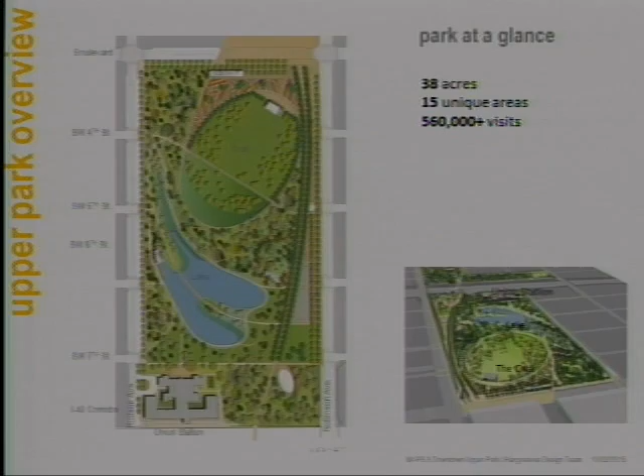One of the issues we've been working on is with the preferred operator of the park, Myriad Botanic Gardens. One of their desires was to add more program spaces into the park to create more of a destination and more income-generating sources to offset operation and maintenance costs. One facility we've been looking at is a new park pavilion on Robinson, on the southern end of the park. Here is Robinson on the right and I-40 at the bottom, next to Union Station, an elevated area.

So we've been looking at creating a big shade pavilion that is multifunctional, creating shade and the space underneath. You would have power and utilities to run several different operational things underneath depending on the season. It could be a skating rink sometimes for roller skating, other times a market, other times demonstration sports. So it's a multi-purpose space that would work both day and night.

The architects, Butzer Urban Architecture, have just started to look at this, and they're trying to develop an architectural style based on the other buildings we already have in the park, and also relating to the Skydance Bridge you can see in the background. So we're continuing to refine it based on the feedback we got yesterday as we move forward.

And so I'll now bring you up to date on the lower park, which is proceeding through schematic design. Last time we came here for the subcommittee, we had three different alternates, and we've narrowed that down to one single alternate and are seeking feedback as we move forward.

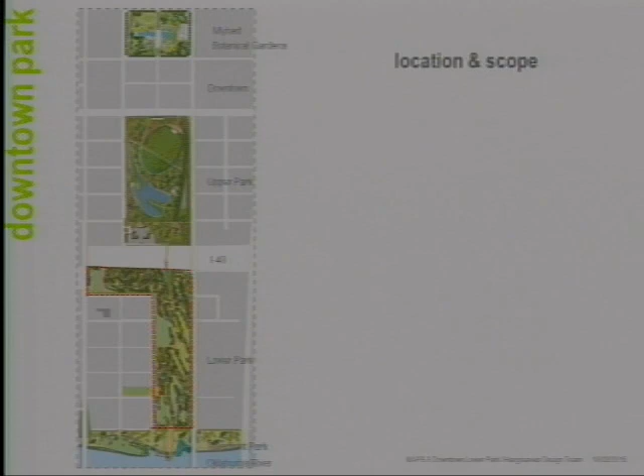Briefly, to remind you all, the lower park is the southern end of the Core to Shore idea. We have Myriad Botanic Gardens at the top, the upper park and the lower park, and then what we all hope in the future would be a new riverfront park that isn't part of the lower park or the MAPS project, but something we encourage thinking about into the future. The lower park is about 34 acres, four acres less than the upper park. It has some unique areas we want to play up on, and its targeted budget is $20.5 million.

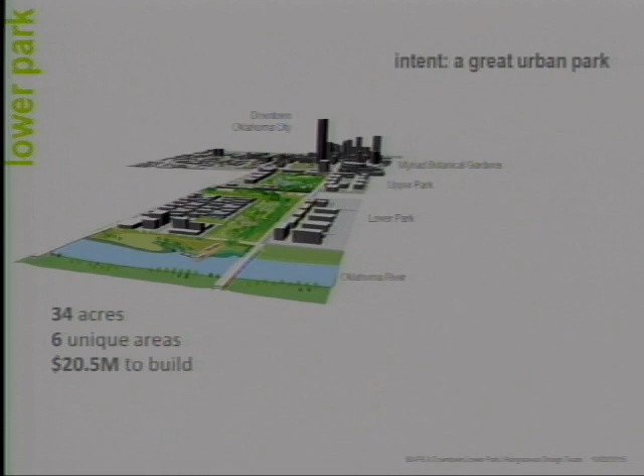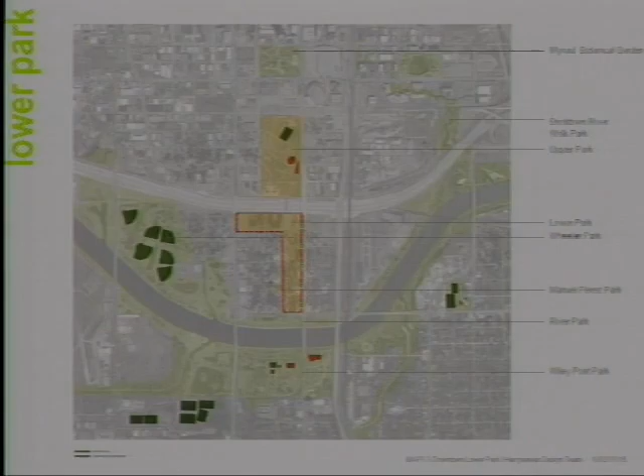We looked at the recreational facilities provided around the lower park within about a mile distance. It's well catered for in terms of ballparks, playgrounds, and other recreational facilities. In the original master plan, you may remember we had the suggestion of a multi-purpose field for athletics, and we're thinking about that as we move forward.

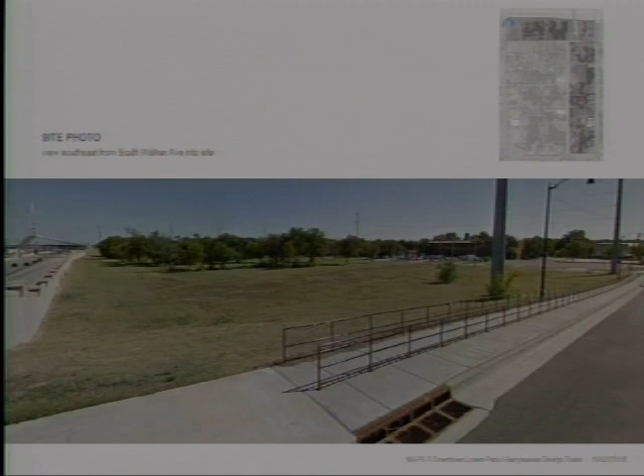The site itself is quite interesting. We're on 15th Street looking south, and you can glimpse the river, which is ideal. Turning around and looking back up Robinson to downtown, fantastic views back to downtown. But as we stand on Harvey Street, that's actually the low point of the site, so you can't see the river from there. 15th acts as a levee. As we stand on the edge of the site, you can see the Latino Community Development Agency in the background.

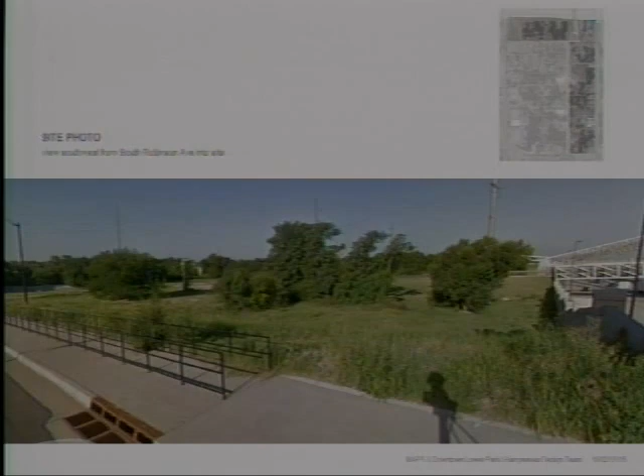And the area that was created as excess land after ODOT had finished with the interstate. Then on Robinson, looking at the area as Skydance lands down, you notice the site is quite well treed, which is very different from the upper park, and it's something we want to build upon. Here is looking at the topography.

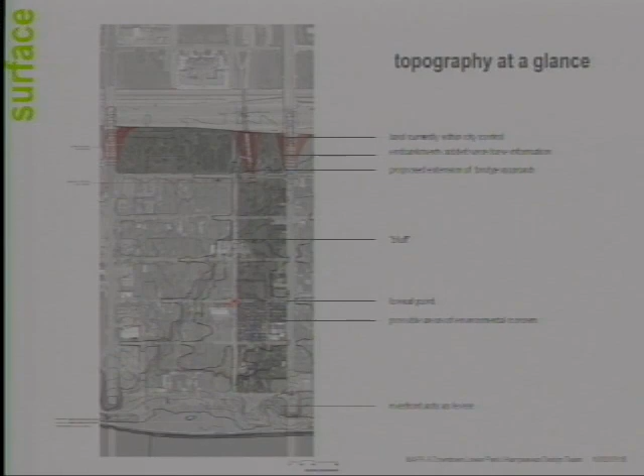There are 3 ramps: the 2 approaches of the roads that go up over the interstate, and the ramp up to the Skydance Bridge. You can see there the low point in Harvey and 13th Street. Actually, towards the river is not the low point, it's actually the middle of the park. And you can see the current land uses, former car yards, many car yards, and light industrial uses as well.

In terms of water, 2/3 of the park is in the 1:500 floodplain, but it is protected from the river, 100-year flooding from the river.

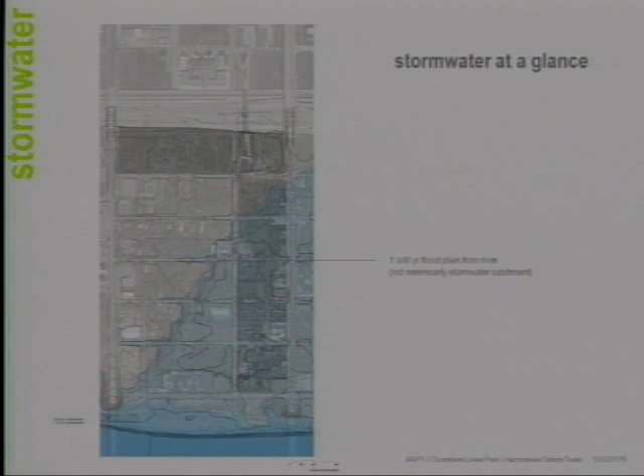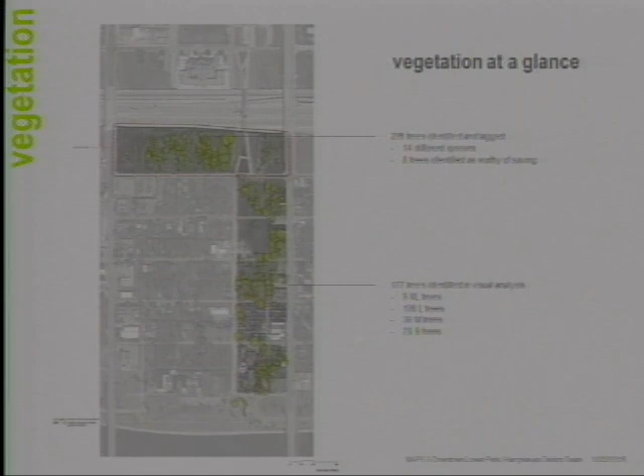The trees - we were able to do a tree survey in the northern part of the park. Confirmed about almost 300 trees up there, and from aerial photography about 117 trees. So even though the trees aren't that special, they are special in terms of providing shade and impact, and quite a different feel than the upper park.

We've looked at the road system around there. On Robinson, we want to continue through the same profile as what we're doing in the upper park, so keeping 2 lanes each way, adding bike lanes on either side, and parallel parking on the park side. On Harvey, we want to keep 2 lanes and add parallel parking on that as well.

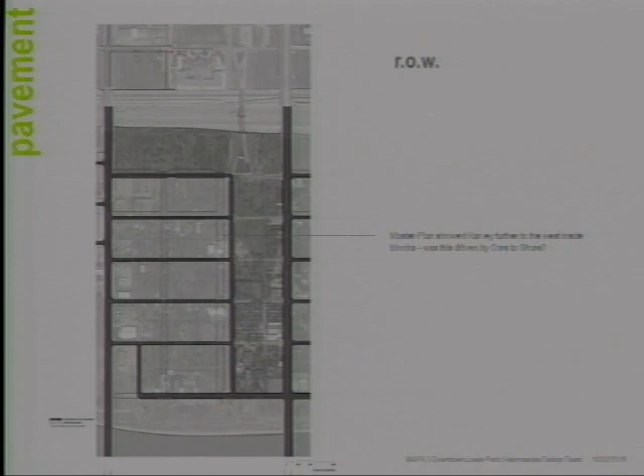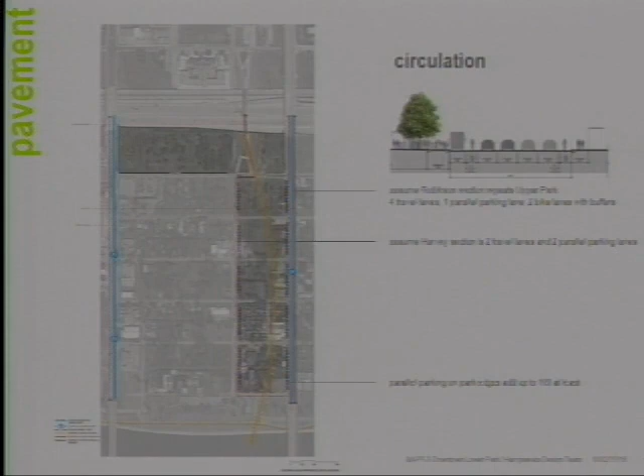In terms of pedestrian circulation, we want to continue the promenade through. That's the main pedestrian and bike, recreational bike connection from north to south. So we would come off Skydance Bridge, proceed through the entire park length, cross 15th at a mid-block crossing, and connect up to the trail system that exists on the riverfront now.

The site also has several existing buildings that we're just starting to look at in terms of the value and potential of those buildings. They are in not great shape, but we're seeing if some of them have some potential to be repurposed. You can see here some of the larger ones are in conflict with the pedestrian and bike circulation in the promenade here.

And we're looking at how the buildings could function both ways. All these buildings were built to face Robinson. In the future, they would have a dual use, facing the promenade and the park as well. So we're just starting to look at that.

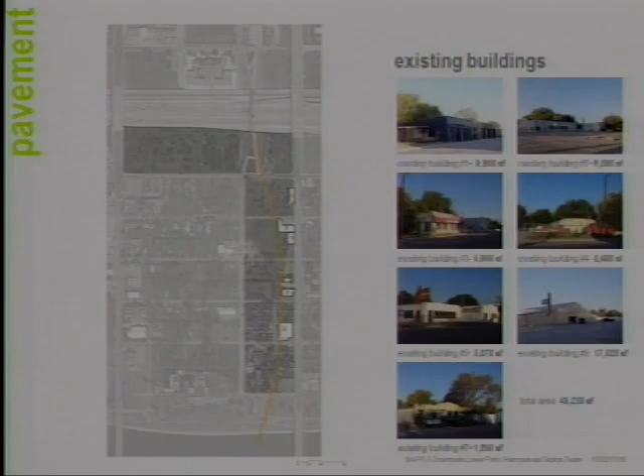As we said, we had 3 options, and we've kind of crystallized those into the thinking of a preferred layout. In the upper part of the park, above the Latino Community Development Agency, we see this still as a sports theme, although we do not want to make it like a sports complex.

That's a much bigger thing that would not actually fit on this site, but we do want to build off the idea of having at least one junior-sized soccer field, with advice from the Parks Department that the soccer field would be so heavily used that it would have to be synthetic rather than natural turf. So we're thinking of it as a synthetic field. It would be also lit for night use. It would have a pavilion associated with it for restrooms and change rooms and for shade.

Amongst the trees, we would have multi-purpose ball courts that could be striped for different uses. Also, as we move south, we're looking at, in the treed area there, a woodland lawn that could be converted into a dog run or a dog park in the future as more dog users come online around the area.

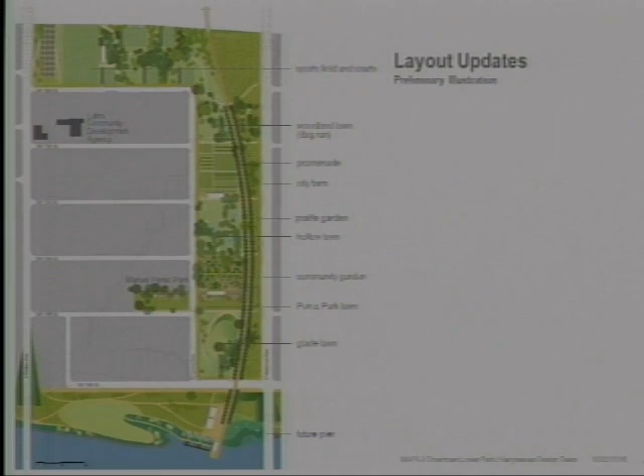As we move further down, it was quite interesting. We met with the Latino Community Development Agency yesterday and the YMCA, and an idea that Myriad Botanical Gardens came up with was, for this end of the park, to have more community involvement in gardening and also in urban agriculture. What's going on there?

Within the park, we have a city farm that would be based on urban agriculture, that would have an educational program associated with it, and a nutrition and health program, which ties in nicely with the programs that the Latino Community Development Agency has at the moment, and what the YMCA is actually interested in moving into as well.

A complement to that would also be a community garden area where membership could actually use a plot, buy or rent a plot for 10 by 20 square feet, and use that as a community garden area.

Between these two areas is what we're calling the hollow lawn. That's the lowest part of the site. Again, this is another interesting picnic area that would have rain gardens associated with it for cleaning the stormwater.

As we move further down there, you can see Manuel Perez Park, an existing city park that sits on the corner of 14th and Harvey Street.

We want to integrate that into the lower park as well. So we're moving a band of that sort of programming across and into the park that would be more cultural uses in terms of music programs, dancing programs, and kids play. That would extend into the park and link up with the city park as well.

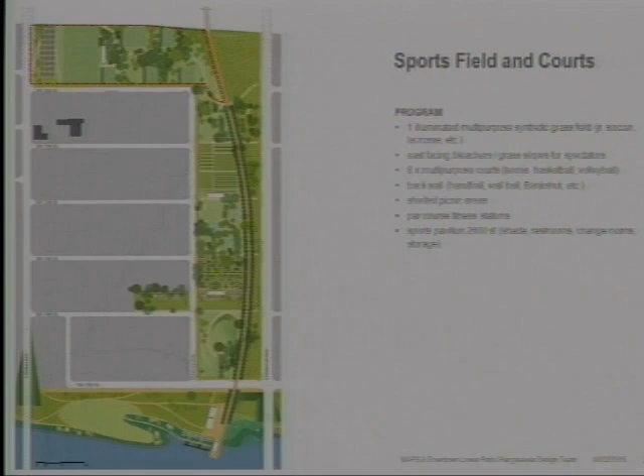We can have a par course and fitness stations throughout the treed area, so there's a trail that you can have exercise routes along, shaded picnic areas, and also a sports pavilion.

So we don't want to make it look like a typical sports complex, so there's several things we can do to make sure it's a multi-use facility that can be run in several different ways. Here's some examples of the different striping you can do, the bleachers and the shade, and the ball courts that could happen there.

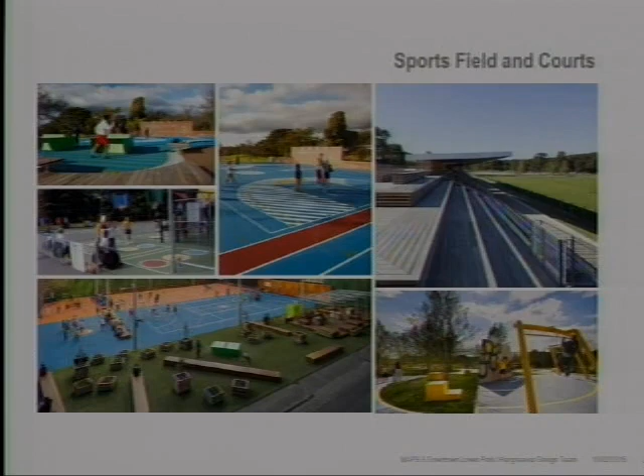The wooden lawn, we think of this as a lawn first that could be used for multi-purpose throwing around a frisbee. When there is more of a demand for walking dogs, it could be converted into a dog run and have a concealed fence around it.

The city farm, about 2 acres, so it would concentrate on fruit and nuts. It would actually be grown by the operator, so this is not a community involvement thing, although it can be used for youth training and programming as well.

Another interesting aspect of this is it can also grow the food for the park cafe and restaurant in the upper park, so it has a farm-to-table connection within the park. And again, youth programming and training.

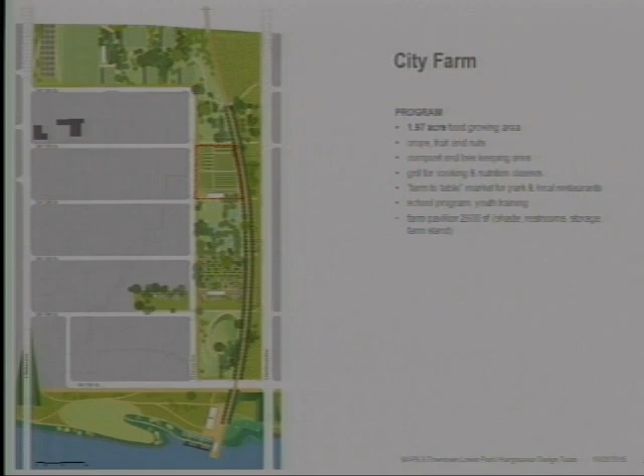The farm pavilion can also double as a farm stand to sell any excess produce for people walking through the park. So again, involving the youth into the picture is important. We're not going to go to the full livestock potential of this, but beekeeping could actually be added as part of the programming as well.

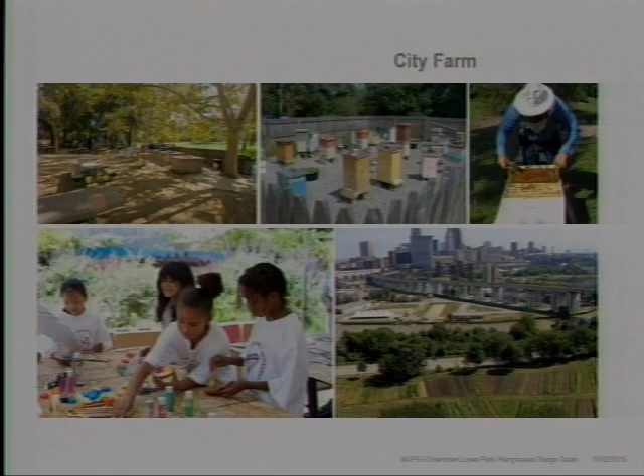The Hollow Lawn, the low park area here, a great idea for big family picnics and hammocks between the trees. There's fantastic trees there. You can sling up some hammocks to make it an interesting area to visit as well.

The community garden is about space for about 170 quite generous sized plots. This could have a seniors program as well, but also a program for young people. And it can also have a kitchen for cooking classes in the pavilion next to it.

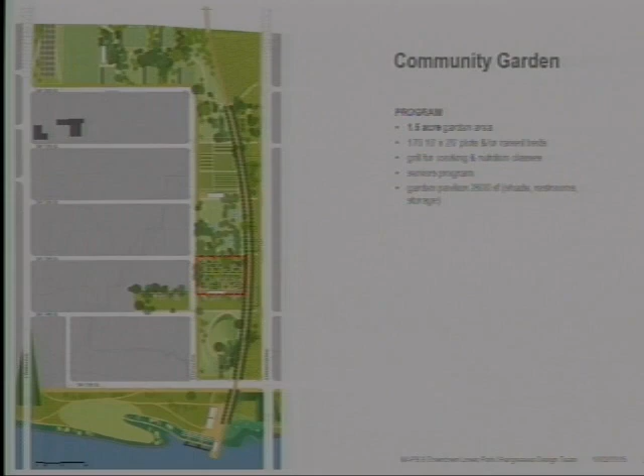So again, it would have raised beds, so it wouldn't be growing in the natural soil that is there. And Perez Park, so that's complementing the park on the city park on the west side and bringing that feel into the lower park.

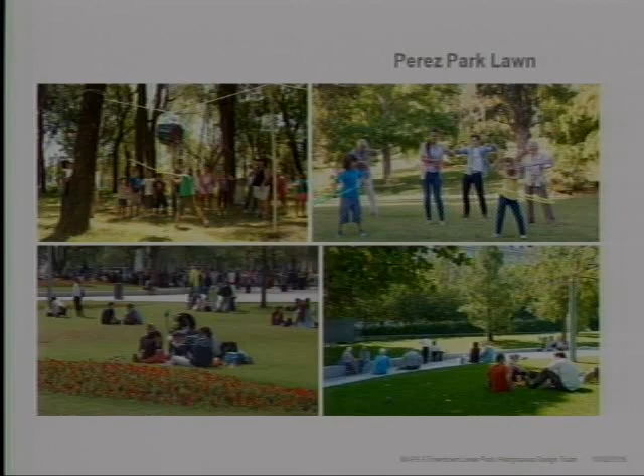So again, family picnicking, kids program, and more cultural, so you can have dancing and music in here as well. And they can also use the glade area with the landform. It'll be a great area for kite flying with the wind as it comes across the river, but also lawn activities as well.

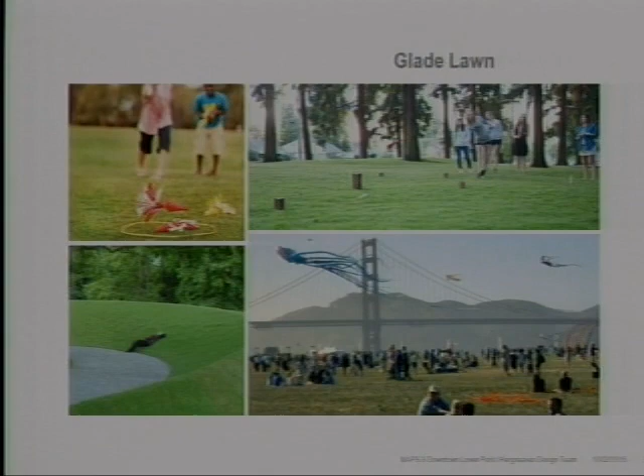And then the prairie, so the strip between the promenade and Robinson, we're going to build upon the feel of a native Oklahoman prairie. It would have different themes along the way.

One block could relate to butterfly gardens, bird gardens, but right at the northern end, as we get to the interstate, we would build that up like we're doing on the upper park, fill that area in so it doesn't feel like a hollow, so it would actually pick up the winds as they blow from the south. That would be an amazing wind garden just with prairie grasses blowing in the wind. Myriad Gardens is quite excited with that potential aspect. So it would be all about grassland, but getting people in it and experiencing it in a way they haven't been able to before.

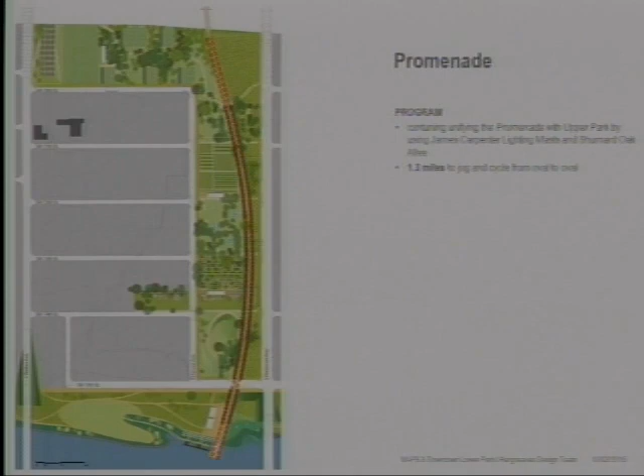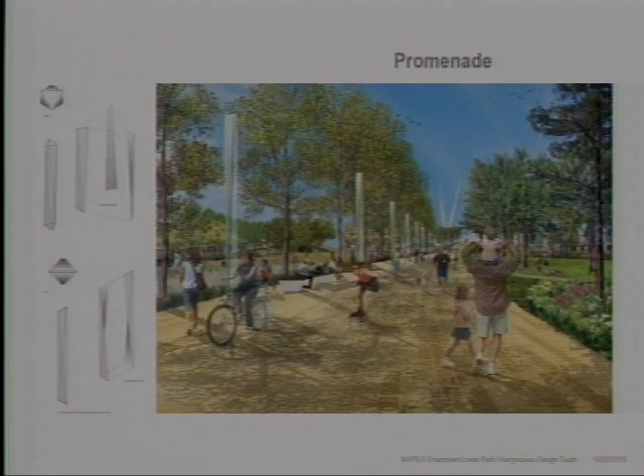And last but not least, the promenade. It's about just over 1.25 miles from the lower to the upper park, so this is a fantastic ability to walk, to ride a bike, and to jog without ever having to cross a road. It would be similar treatment to what we're doing in the upper park, so the mast lights we're doing there would continue down. This really is the unifying element between the upper and lower park and connects the core to the shore. We're continuing to develop on that.

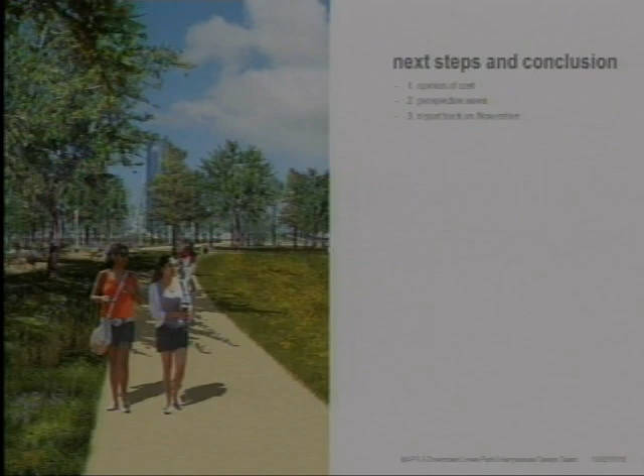We had a great meeting with the Y yesterday and the community, the Latino Community Development Agency. They've come back with some great suggestions that we're going to build into the plan now. We'll come back next time, show you all an update on this, and we'll have a first pass at cost as well, because we want to have a budget check, which was the whole point of doing this exercise right now. So thank you very much, and I'll answer any questions you have.

Any questions? Michael? I have a couple. Going back to the upper park and the pavilion, you mentioned roller skating and small concerts and events like that. Won't you need a building to rent skates and provide restrooms and things like that in conjunction with that?

The idea now is that would be a concession. So like an ice rink in winter, a concessionaire would bring in all the flooring, the fencing, the ticket booth, any portable restrooms that are needed for that, and it would be up for 6 weeks, and then it would all go away. So the idea right now is to try to build the minimum permanent facilities that we can and just see how it goes. If there is a need for more, bigger storage or permanent restrooms, that could be done later. But I think the idea is to build the minimum that we do now, test out the programming and what works and what doesn't, and then add more later if necessary.

My other question has to do with the upper park design. It was primarily designed when we thought the convention center was going to be to the north of the park, designed to open up to the convention center and the flow of people letting out of it, coming across into the park. The restaurant was located there and a lot of other things, partly because of that. Now that we've had a new site for the convention center, do we need to relook at the design and make sure we're still providing those elements to accommodate the crowds coming in and out? I see the promenade running right along that curve. It's almost like they come up and then suddenly hit the promenade, and then there's a barricade instead of an open gate or open entrance into the park from the convention center.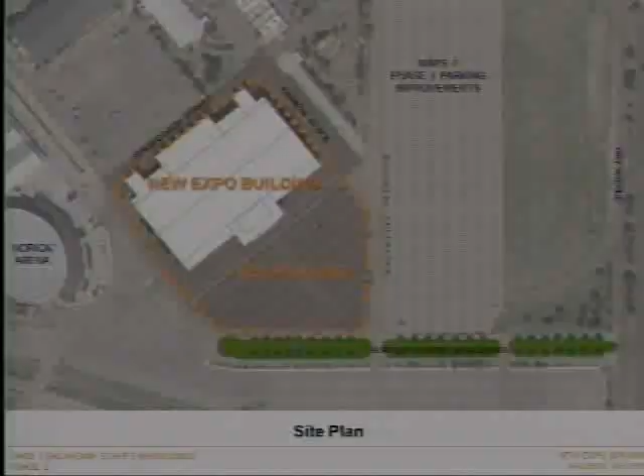This first slide, I think everybody's pretty familiar with. It shows the orientation, the park setting, and the footprint. The second slide is the actual building itself broken out in areas. I'd like to point out the broken line type at the top and bottom of the building. Those are ancillary areas that have already been cast, most of them, even the upper elevated decks, cast in concrete.

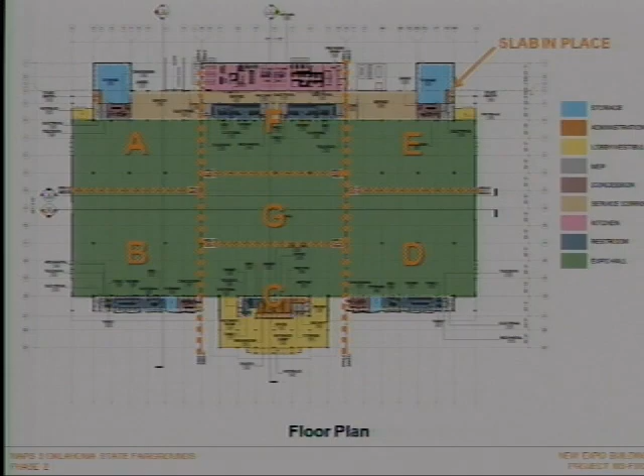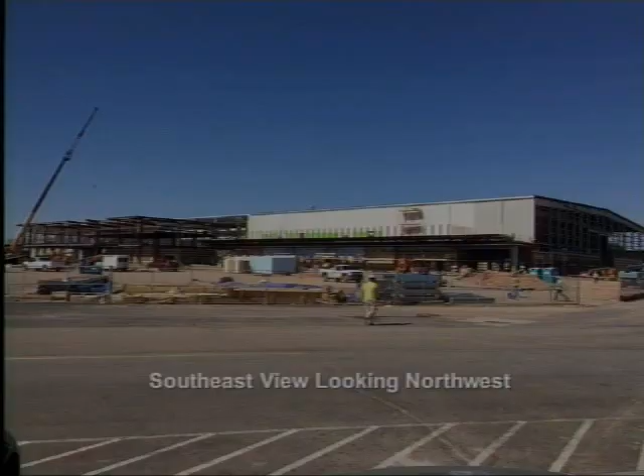This is a view looking north-northwest from the south extents of the site. You can see the front entrance and the beginning installation of the wall panels and roof panels. Moving around to the east-northeast from that previous photo shows the east elevation, a closer viewpoint of the front area D, showing the masonry work and the beginning of the superstructure.

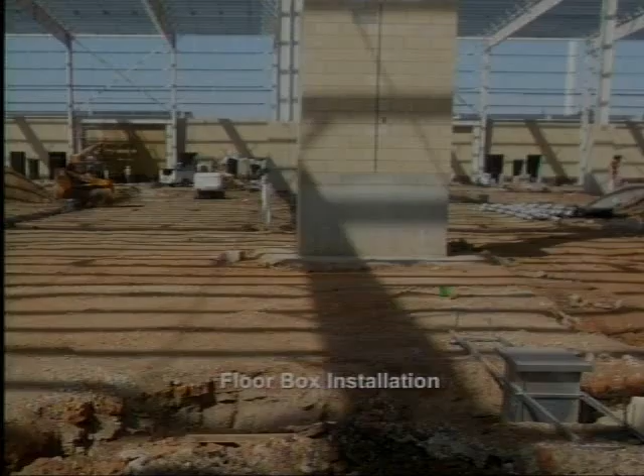This is a composite view of one of the floor boxes in the lower right, several of which will be spread at 30-foot dimensions throughout the expo hall at the finished floor level. And that's an intermediate masonry column that bears a structural support column out in the expo hall.

We had 5 items which made up change order number 10 that we reviewed. The first one was an existing power pole that after review and consultation with the engineers and with the general contractor, it was deemed that we could leave the pole, take the credit, and go ahead and put our superstructure on it as designed in the documents.

The second one was the food consultant determined that for the kitchen to be more user-friendly, it would be advisable to put a faucet at the mixer. This is the infrastructure for that.

The third one is hangar door power. That hangar door that we've seen in the previous photos, the manufacturer strongly suggested 2 fuse disconnects in lieu of the one, so that's an updated design as it relates to the manufacturer's requirements.

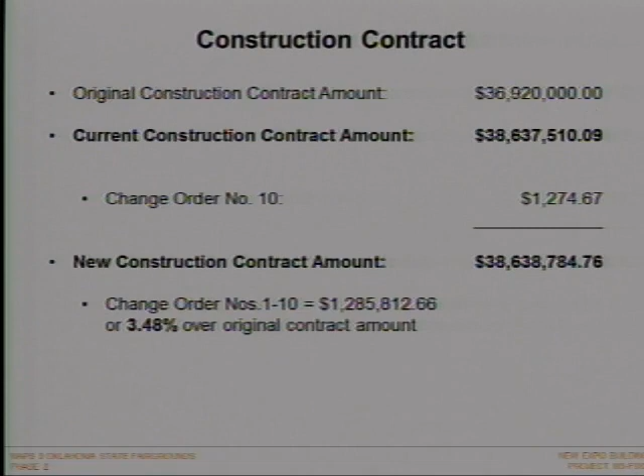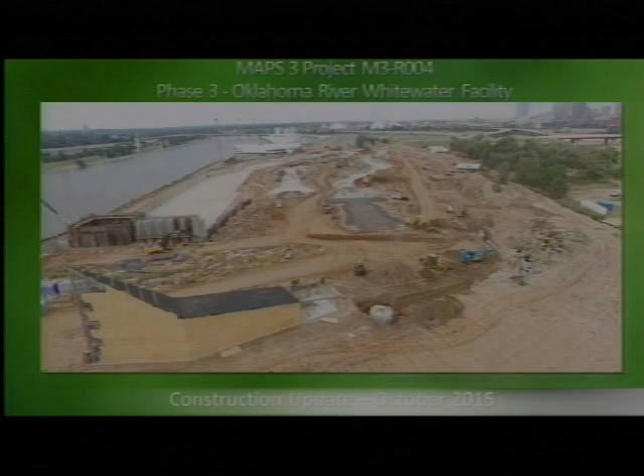Just a quick update. Looking from the east, from I-35, you're now seeing quite a bit of activity on all the buildings, on all fronts. We continue to work on the pump station and the channels. The form in the front of the screen is the kayak building, which if you drive by, as of yesterday all the skin on the east side is on the building. The roof is going in next week. The pump station's coming up, and everywhere on site we're working—road work, everything. Quick look at the schedule.

As we mentioned in previous presentations, the first couple of bars are mostly early mobilization and site utilities, which is why you're seeing a lot of 90 and 100% there. As you get into the middle of the chart, that's your buildings—the main buildings tracking somewhere around 50 to 60%, with the kayak and rafting building a little behind that in the 40s. You're seeing some of the change orders to the far right of the slide. The early ones are the add-backs of the $4 million credits, and as you work toward the far right, those are the most recent ones—the rapid blocks add and some other miscellaneous changes we've made.

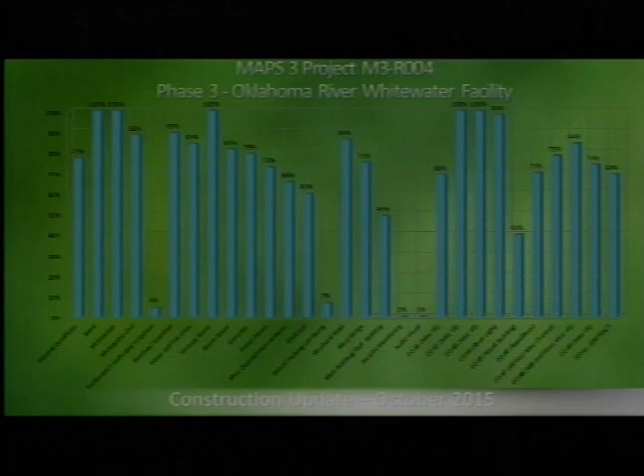Overall, we're about 70% through the project, about 369 to 370 days in. We've got about 5 months to go, so we're tracking right on about 70% right now.

Starting at the pump station, again from the east of the site, you can see an aerial view here—basically all the walls are up. We're lacking at this point a roof slab, which we're aggressively trying to get done. That will complete the dry-in of the pump station and allow us to start coming in with the mechanical and filtration systems, everything else. Once that's done, we'll start backfilling the dirt section to the east of the pump station, which becomes your upper pond. So a lot of dirt coming in on site over the next 2 to 3 weeks, and we'll be filling that pond up to elevation.

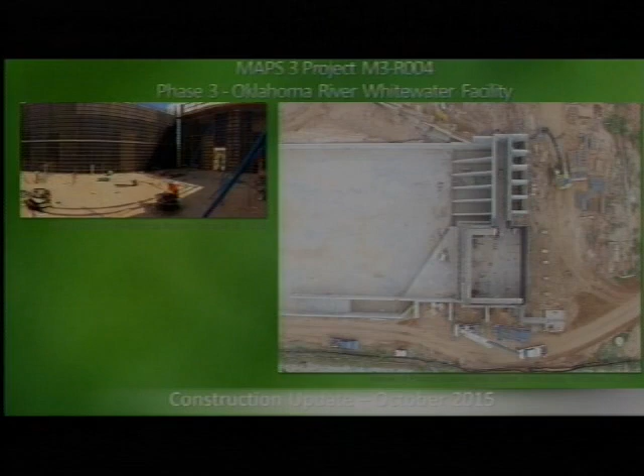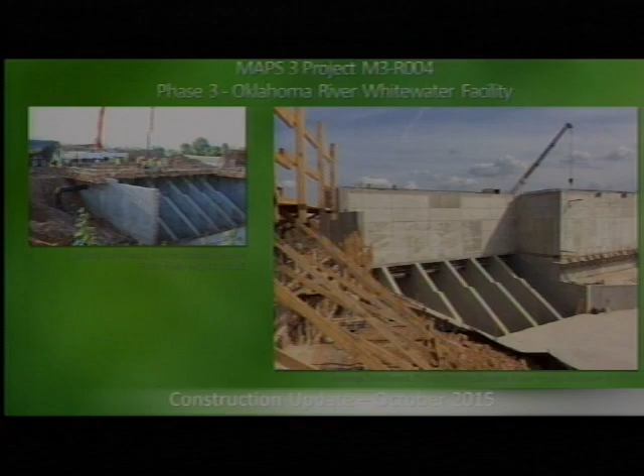A couple more shots from the north side of the bottom pool, looking back at the pump station. Back in July, we were pretty much at the first level, with no vertical walls above it. As of a few weeks ago, all the walls on the pump station for the second floor are up. The formwork you see in the foreground is actually for that large retaining wall that comes out off the pump structure, and that's being stripped today, so that concrete's done as well.

Looking from the south, right at the river, back to the pump station—the channels are a lot cleaner than the last time you saw them, because we've cleaned everything up to put in the waterproofing. There are 3 different waterproofing methods going in inside the pump station itself, where we have continuous water and aggressive water coming up through the structure. We have a thick tarry substance that basically keeps the concrete from leaking at that point. Throughout the channels, there's a variety of control joints being sealed, and about every 160 feet we have an expansion joint for the concrete, which is also going in.

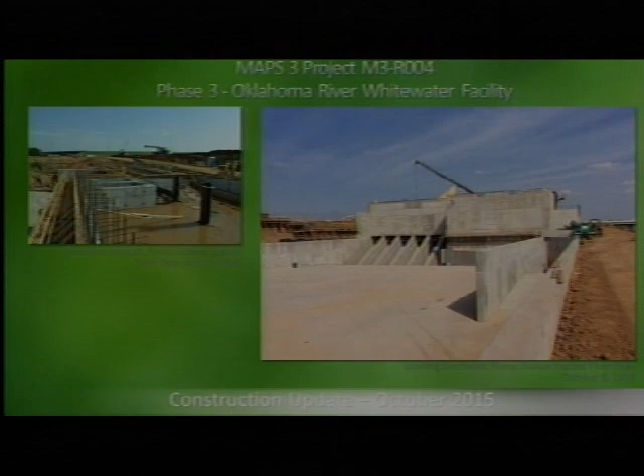A lot of that activity is starting at the pump station slab, working its way back west to the bridge, which, from previous conversations, is our retaining basin—so when it's operating and also turned off, that holds water. We're trying to get that all cleaned up and turned over, and we're going to punch that out and put some water on it in the next couple of months.

Looking back a little bit on the channels here, we're from the east looking down. The channel to the right would be the rec channel, the channel to the left would be the comp channel. I think what you've seen before in some of our presentations, there was a disparity between the two channels, with the rec channel a little bit ahead of the competition channel. While that's still the case, we've caught up on the slab pours.

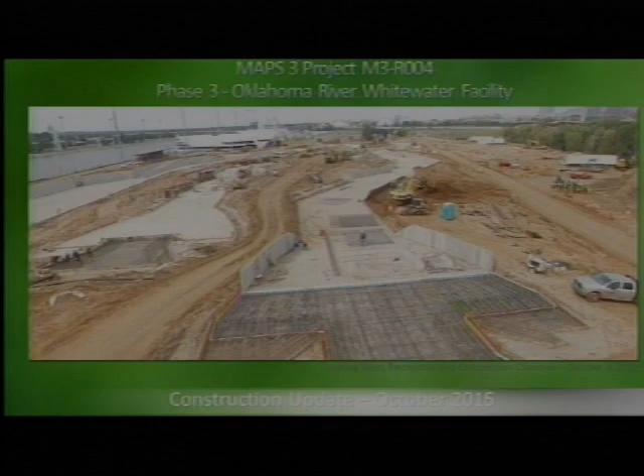Right now we have about two slab pours left on the competition channel and one on the rec channel. So from a slab perspective, we're basically done at that point. Then there's a bunch of walls that come in—vertical, sloped, stepped, terraced—and you'll see that activity continue for the next 3 months. A little bit more on the channels, just looking down the competition channel on the larger picture here, seeing all the formwork for the various walls.

The smaller picture shows the control joints going into the slab. This is the first shot of our slope wall, which was poured 2 weeks ago, and we're continuing another pour this morning. We think we have 3 slope walls in to date.

It shows the rapid blocks and how they fit in. You've all seen the rectangular one and the angled one—there's a special fit that actually goes right in between the base and the wall. It's on a 3 to 2 slope, and that fits right into the wall and creates the jetty we're trying to get. The smaller slide on the left basically shows some rustication joints in the wall formwork to give a little architectural breakup of the concrete.

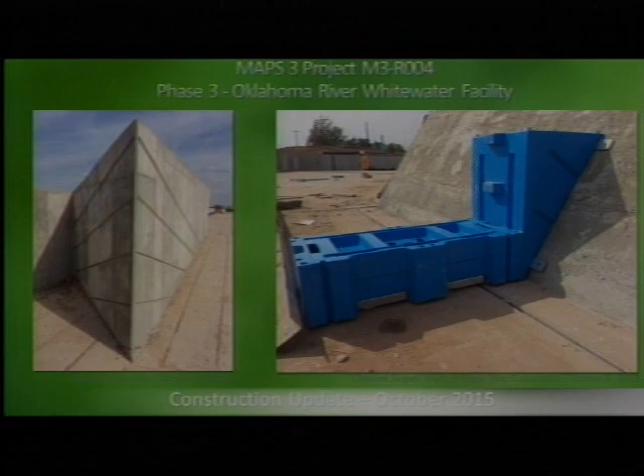A couple of overall shots—they're a bit fish-eyed, but the top one is standing at the raft building. To the left you'd see that depression, and the main building just peeking out on the edge of the slide. As you look to the right, that other building is the raft building looking down to the pump station. You can see the breadth of what's going on with the waterproofing here, all the cuts going into the slab, and the magnitude of how much surface area we have out there.

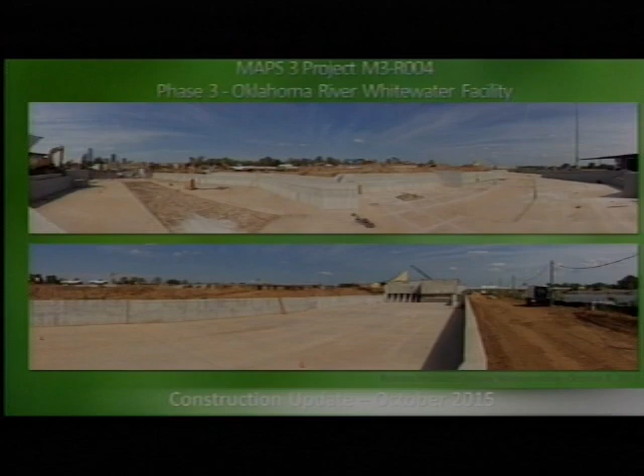This is just our channel concrete pour schedule. We update this pretty regularly, but it shows basically all of our slabs have been poured, with the exception of, on the right-hand side of the slide, the last two sections on the comp channel and one on the rec, and then essentially the upper pool. All that slab work, including the upper pool, we're hopeful will be poured by the end of this year. And then at that point, it's basically walls—miscellaneous walls here and there filling in.

This is looking out from the job trailer at the soon-to-be parking lot. This has changed drastically over the last few weeks. We've turned the paving operation of the parking, as well as 6th Street, Phillips, and 5th Street, over to the paving contractor, and we're hopeful that by Thanksgiving we'll have all paving done on the site. It's going to give us access to everything out there.

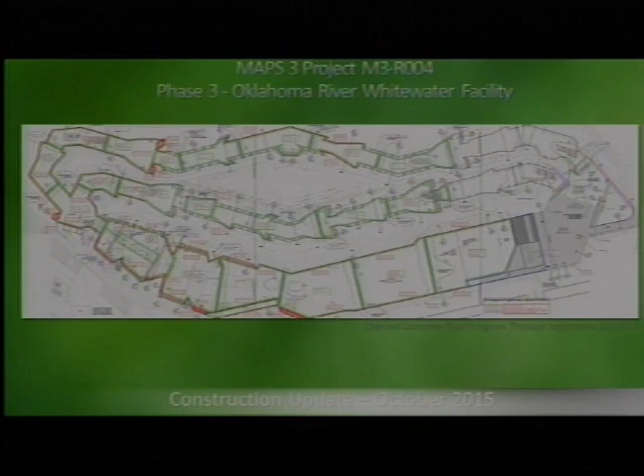In about 2 weeks, this is just basically street and parking paving. In about 2 weeks we'll also start doing the sidewalk paving, and the operation for that is to go along 5th Street, which is on the north side of the site, all the way to the east, come back along the river to the main building, start sidewalk work, and basically pave your way off the site. So we'd effectively be doing the south side of the site first, getting all of our sidewalk in, buttoning up that river edge, getting out to the east, and then kind of working back to the west on 5th Street.

A couple more shots of the buildings. The small picture is from back in July showing the main building, where you can see quite a bit of exterior still showing. In the bigger slide, the main building is completely closed in at this point. Roof's done, exterior siding's done, storefront's in, curtain wall's in, all the glass. The only thing we're missing is doors on the exterior.

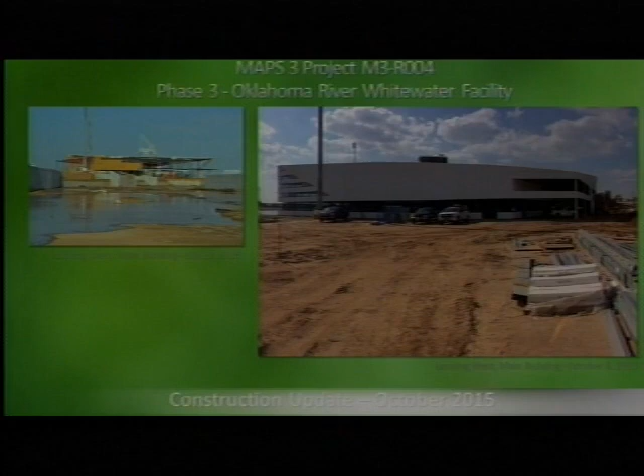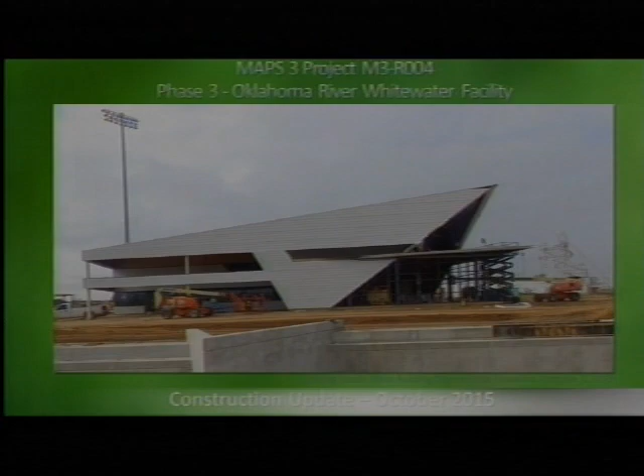A lot of work going on in the interior. There's a front shot of the main building, and to the right there's the main A-shaped front entry, which is all storefront that's been done. We basically just need the doors and some EIFS going in, and that's pretty much the exterior of the building.

Looking at the interior of the main building, this has changed drastically over the last few weeks. It's studded out, and we've been hanging drywall for about a week now, so this is closed-in space. The bigger slide shows the interior open office area for the administration portion of the operation, and the smaller picture is the mechanical yard just outside of that.

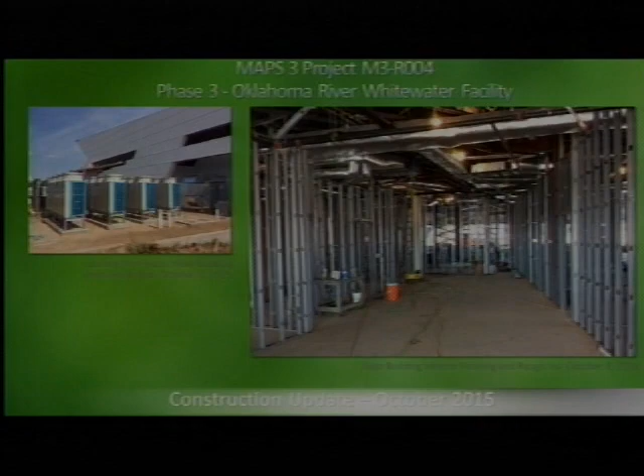Looking at the raft building, the roofing's going in next week. All the steel's up, the exterior's been sheathed. Rough-ins, mechanical, and electrical are basically complete, so we have interior finishes going in on that, and we're continuing the shingle work on that building.

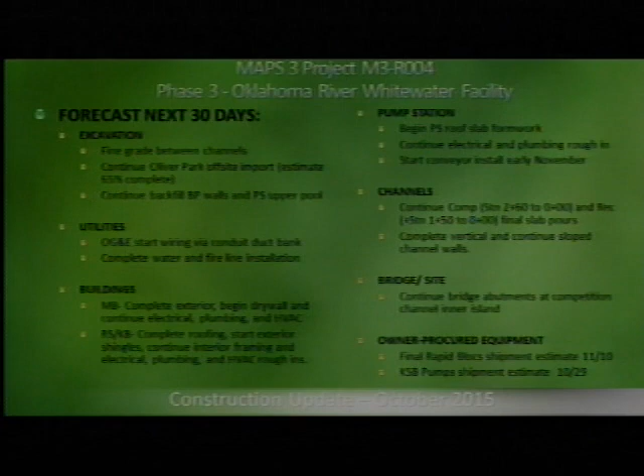Just a forecast of where we are and where we're going. The majority of the focus right now for the entire project is on the concrete pours and the pump station. We've got to get the buildings dried in so we can continue the mechanical and electrical work in the pump station. We're on track to hopefully pour the roof slab in the next few weeks and start doing some interior work by year's end.

Site work is bringing in all the grading and dirt work. Oliver Park is basically backfill for the upper pond and some of the minor retaining walls. We should be, by January 1st, about 5% of our fill still left out at Oliver Park, which will basically be fine grading in the end.

Utilities: OG&E is pulling wire on their main feed. As mentioned before, they have 3 service points for this project, and one is a medium voltage delivery of 4160 volts. All the infrastructure, conduit and duct banks are in, so now they're pulling wire. We're hopeful that by December 1st they'll be ready to energize power to the site.

Buildings, we've already talked about those. Channels continue buttoning up the slabs and then continuing the wall pours. The bridge is on site, as we've said before, waiting for the abutments to be complete. I think we'll probably be there in about 2 to 3 weeks, so we'll have the 2 bridge sections up again, probably by Thanksgiving.

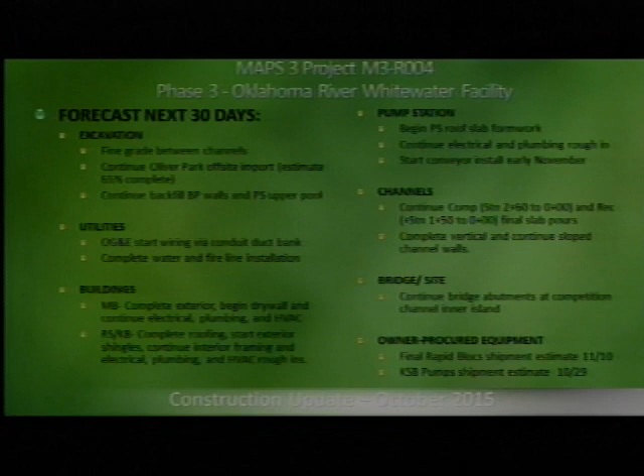Lastly, on the owner-provided equipment, we pretty much have everything on site. The only thing missing is the last shipment of Rapid Blocs, the 4th shipment, which just shipped earlier this week, so we'll have that in 3 weeks. We have all the other equipment as discussed, and the pumps for the mass flow shipped out on the 12th and should be here by month's end, at which point everything's on site. That concludes our update. Any questions?

Questions? Jeffrey, I have a quick question. There are 5 pumps? 6 pumps. And I assume there's mechanical redundancy, so if one or two go out the facility still functions? Yes, we designed it for maximum flow with 6 pumps.

It's about 1,250 CFS. You can run all of them, or you can run 5 and still have a full operation on 5 pumps with both channels. With one channel, you can run on 3 or 4 pumps. By comparison, Charlotte has 7 pumps, smaller pumps, about the same flow. They only run 6 most of the time, keeping one out of rotation just in case something goes wrong, and on rare occasions they'll run the 7th one.

We see that similarly here. You'll probably run pump 6 for the first couple months because it's like buying a new car, everyone wants to ride fast. Then they back it off and run it at 5. It's more economical, less power draw, but you still get the same flow out of it.

When doing competitions, you'll probably put the 6 pump back on. We suggest in our owner's manual that we rotate the pumps so it's not always the same one being off, in case one fails. Charlotte uses a different manufacturer but the same type of pump, and has been running for 8.5 years without ever taking a pump off-site. Everything's done on-site, checking seals and bearings. You have local groups available to service these pumps, which helps a lot, and we're also looking at keeping a shelf supply of frequently-needed parts stored locally to reduce maintenance time.

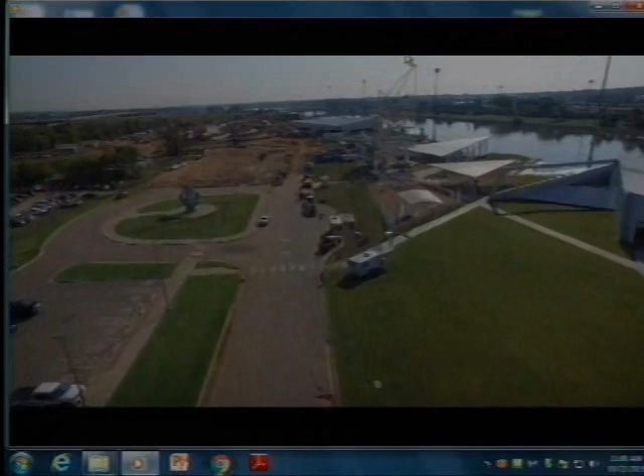Downey Contracting is working hand in hand with the designers, consultants, city staff, and the Oklahoma City Boathouse Foundation to deliver this complex, large-scale project in time for the 2016 World Stage Events. We'll start at the west entrance.

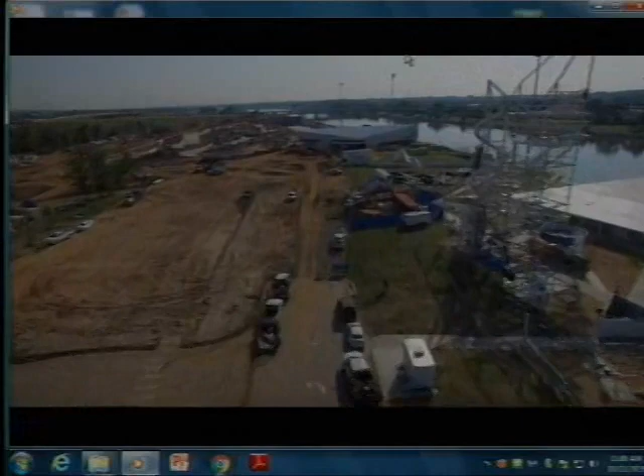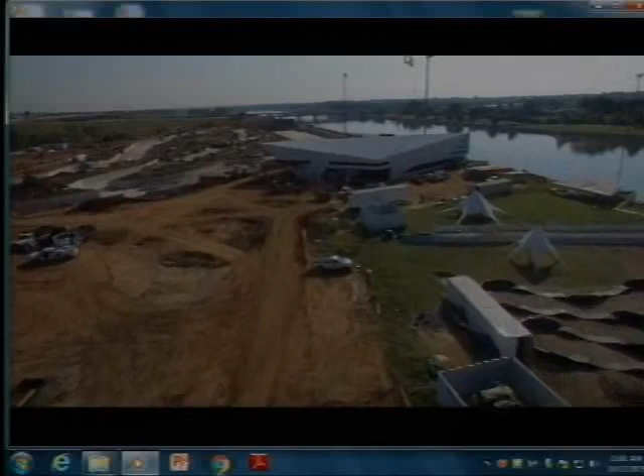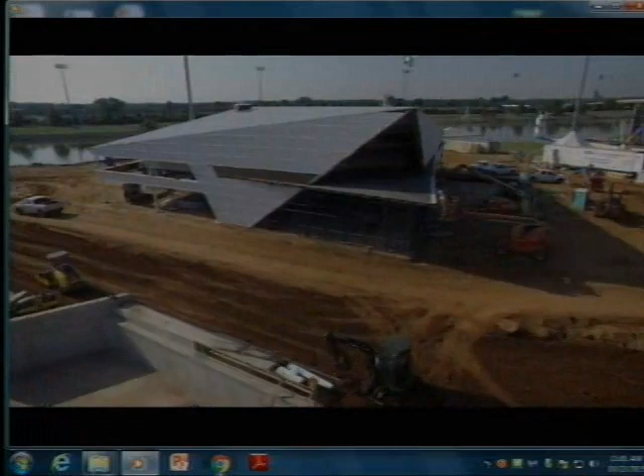The parking lot extension along Riversport Drive, which will add more than 100 parking spaces, has been graded and paving will begin soon. Coming up on the main building, you can see the completed exterior which coordinates with the existing boathouse structures. The storefront entrance is complete and work on the interior is in progress.

Next, we come up on the rafting building. This is where rafters will assemble their gear and start orientation. On this building, the roof is complete and exterior framing has begun.

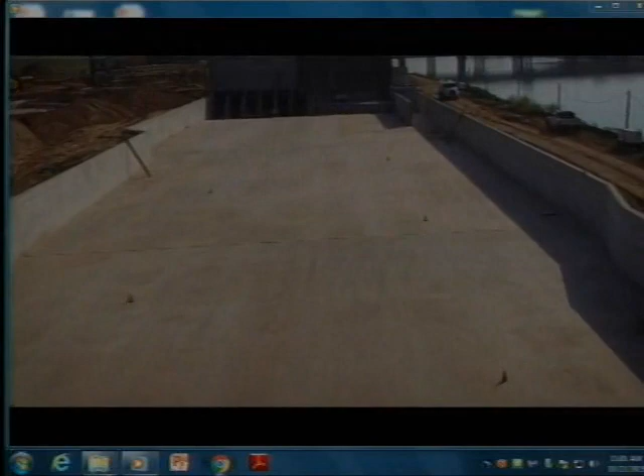Here is the entrance into the bottom pool where terracing and steps will provide access to the water's edge. The sloped walkway will serve as a ramp for the rafters to enter the bottom pool. This concrete work is complete and is now ready to waterproof and apply a finished grout coating. More than 11,000 cubic yards of concrete will be used for this facility.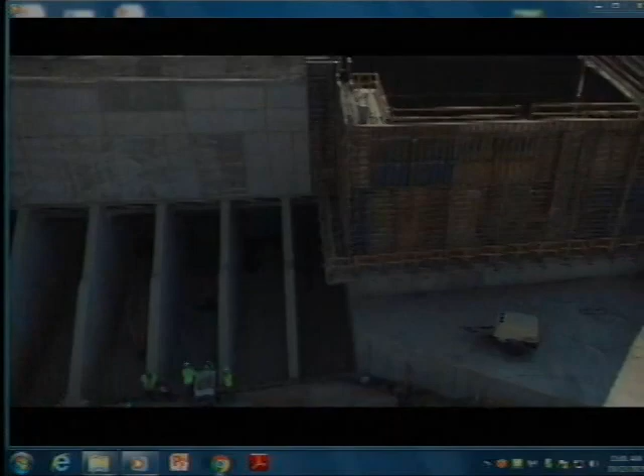Here we see the pump house. The mechanical and treatment hub will recirculate, filter, and treat 14 million gallons of water per day. Electrical work and framing is in progress, and the roof will soon be placed to complete the pump house. The pump house will include 6 pumps weighing more than 12,000 pounds each. This structure will pump nearly 500,000 gallons of water per minute. That will make the freestyle channel at the end of the course the highest volume pumped whitewater channel in the world.

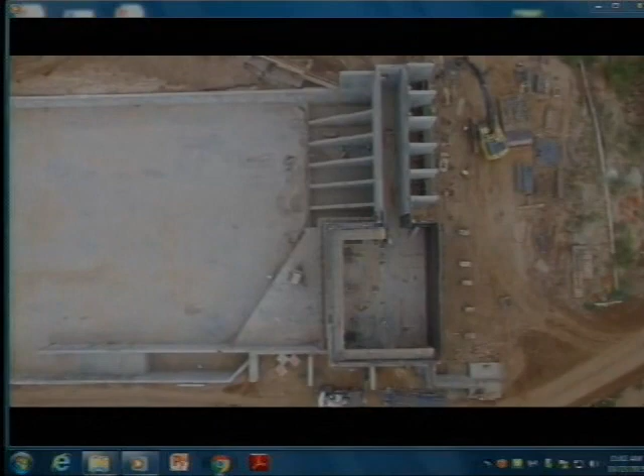Here we see the kayak building on the east side of the upper pond. The roof is complete and exterior framing is in progress.

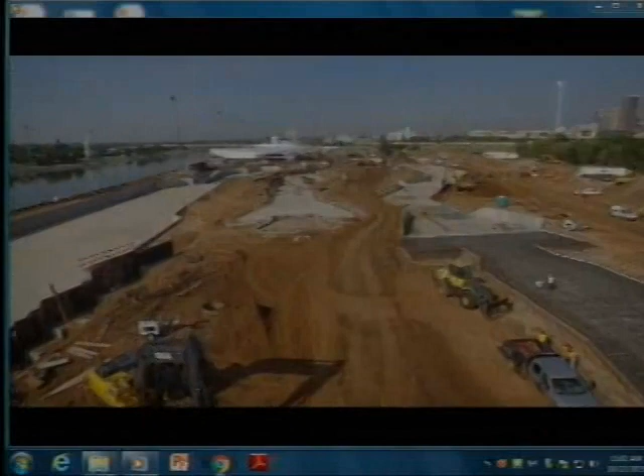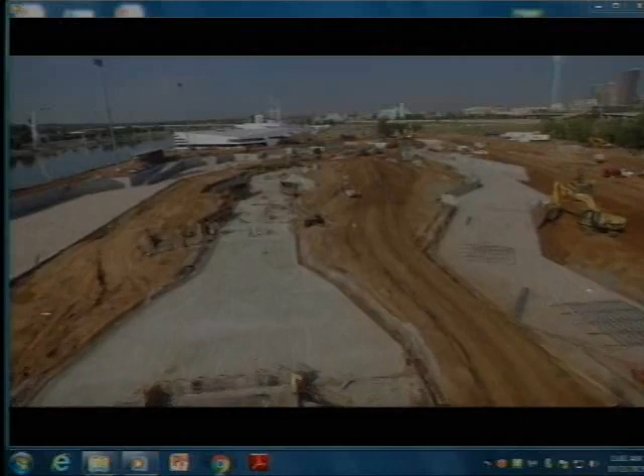As we turn back west, you see the channels are beginning to take shape. The recreation channel now reaches the point where it will connect to the upper pond. The competition channel on the left has one section remaining to complete its length. The space between the channels is being prepared to develop a landscaped area for spectators.

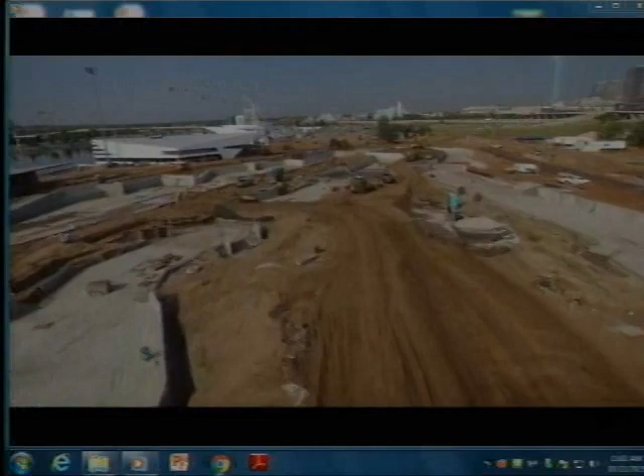On the left, work has been done preparing for the slab at Rotary Point Stage. The bridges have been delivered and will soon be placed over the channels. Bridge footings are currently being constructed. This completes the construction update and site tour of Riversport Rapids.

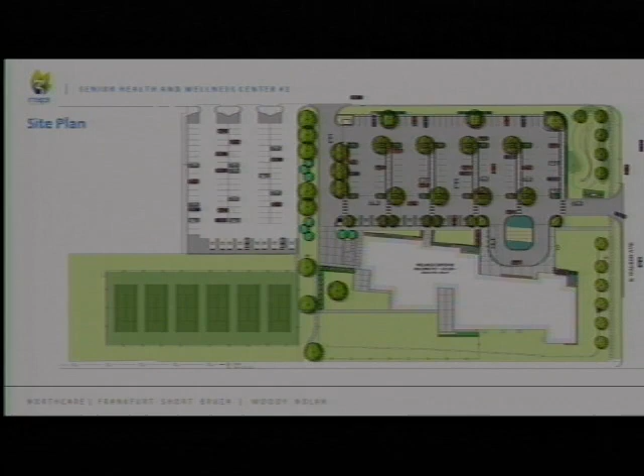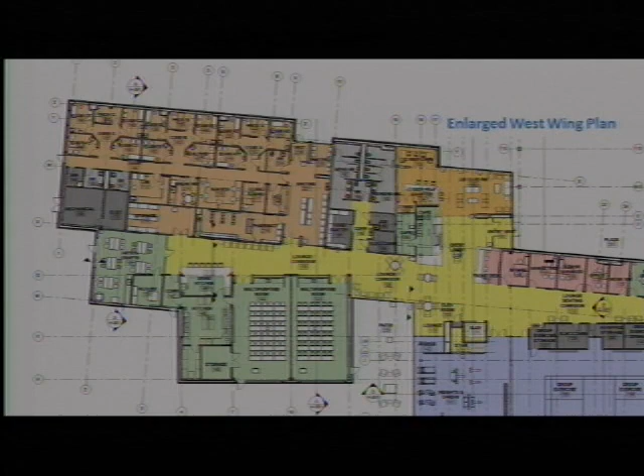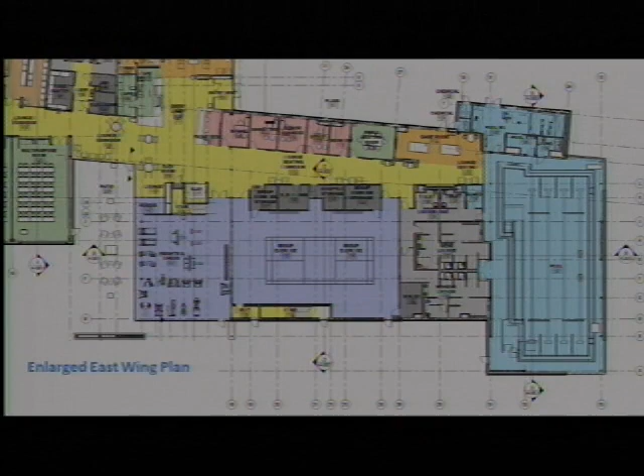In the center of the group exercise room, that's a pickleball court shown there that you can use that way, and it's also subdividable for other uses like aerobics. To the left of that is the weights and cardio space. Off of the main lobby area, you can see the reception desk right above there, controlling access. And then we still have, on the second level, the mezzanine, which is the walking track that also has some fitness equipment there that opens into the lower space.

The entrance court for vehicular access has benches, an entrance drive, and benches surrounding this area for waiting.

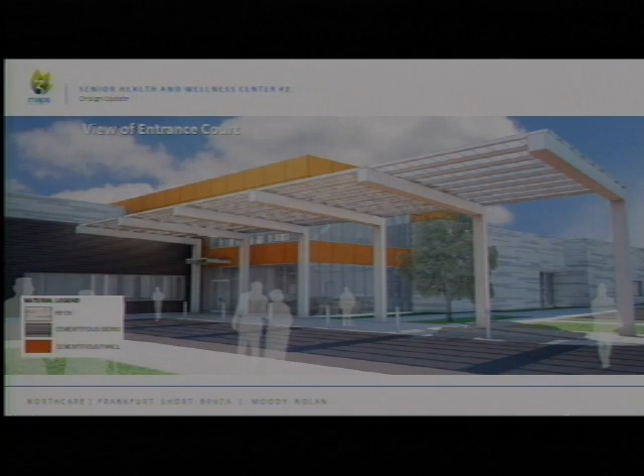The idea of the concept was very light, open, and airy. We tried to keep it as open as possible.

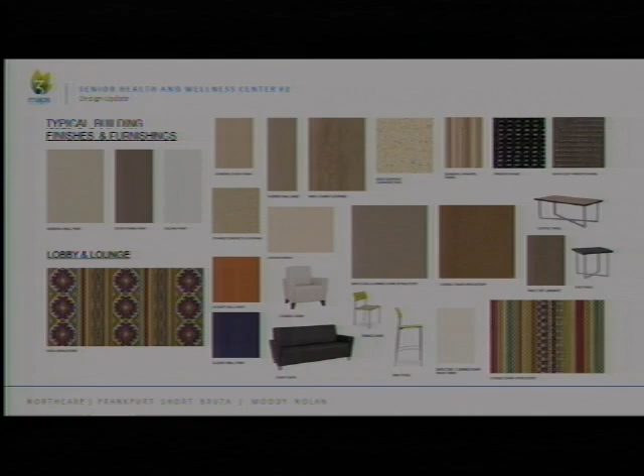And this just shows typical building finishes and furnishings. The primary idea with the color scheme was, again, light, but also adding color. We brought a Hispanic influence with bright orange and green colors into it. We think that'll be really bright in that space and make it fit into the area.

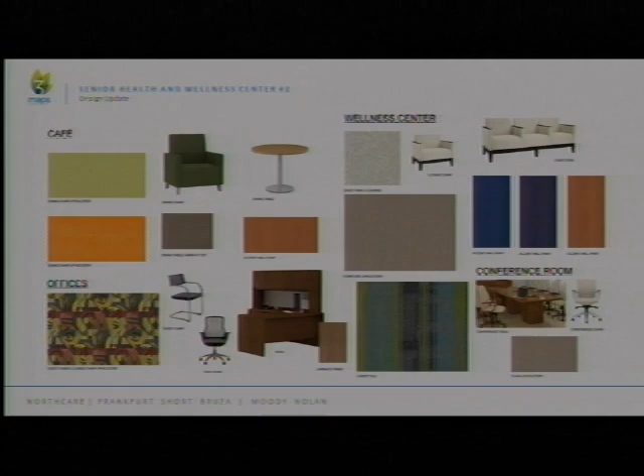There's more furniture and colors throughout the space, same color scheme. I'm not going to go through all of them. We did go over it, I think, previously.

And the rest of the spaces, arts and crafts, aquatics. Aquatics has a finish—well, I think we had tile on the deck area. We've gone to a Diamond Brite finish for some budgetary reasons throughout, the same finish that's used inside the pool as well, and we've gone over it with all the consultants, and everybody, and the user. They're fine with that. Here is the budget where we are right now.

The total construction budget is $10,560,000 for construction and FF&E. Our total estimate right now, all inclusive, is

$10,467,799 for the base. We've had to identify a few alternates just to make sure the bid stays within the budget.

One is the 3-bay entrance canopy in the front. Two, fixtures, furniture, and equipment for the health clinic. Number 3, the operable partitions that subdivide the multipurpose room and the group exercise area. Number 4, FF&E for the arts and crafts room. Number 5, exterior furnishings, mainly on that patio area on the south. And number 6 is the tennis court parking resurfacing, which is the existing parking area on the northwest.

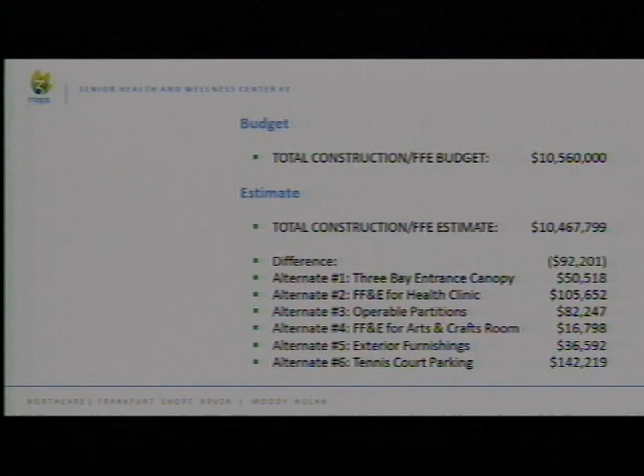Item number 10, David.

Mr. Chairman, the next 3 items are all for the Phase 3 trails. Item 10 is a recommended resolution approving a contract for engineering services with Cabinets Engineering LLC for MAPS 3 trail improvements, Phase 3, Project 1, Lake Draper Trail, fee of $295,500, Project M3-T003. This is for the Lake Draper Trails.

It's approximately 10 miles of trails. We've broken it into 3 separate projects, and we've gone through the usual procedures to hire the engineers that are listed here. I might add that the Trails and Sidewalks Subcommittee did not have a quorum this month, but they did discuss this, and there was 1 dissenting vote.

Just procedurally now, we will vote on these separately, but they're all 3 connected. Is that what you're suggesting here? And Sue, you want to comment on what we have in front of us from the Trails Committee?

Just to say again that we only had 4 members, and 3 of the 4 were in favor of moving this forward, and the 1 member is just opposed to the trail. He's been here already and voiced his concerns to this committee. So you heard from him. That's right, he made his point about just not wanting to do this trail. Correct. Okay, any other questions?